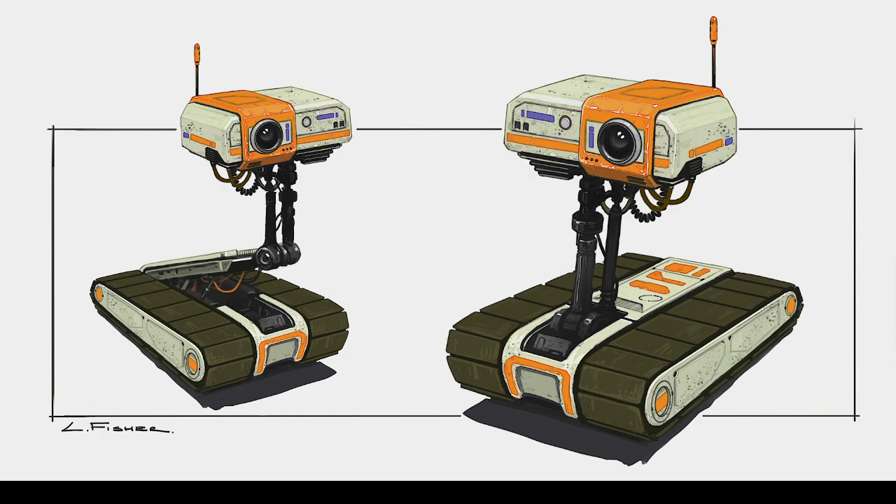There we go. And also, I want to change to a different image because that's not going to show what I need to. Properties. Right place. This one? Yeah, looks like this one. This one right here. Okie dokie. Let me swap over to that for a moment.

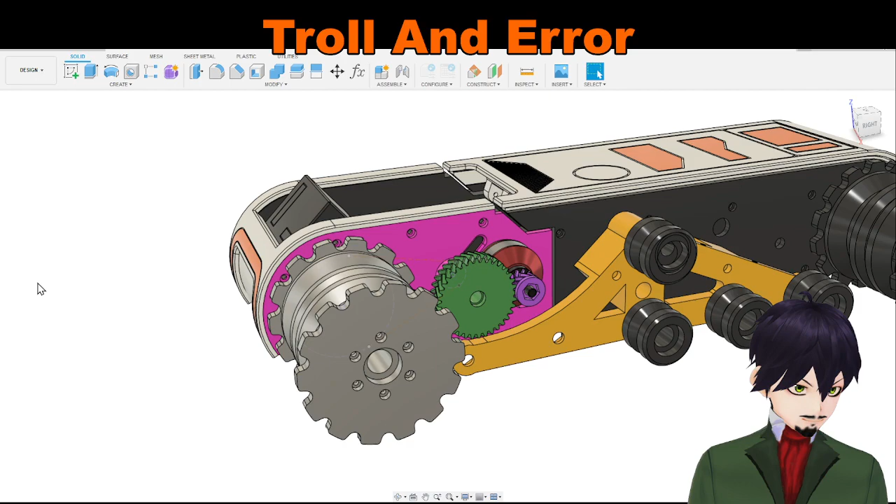Fusion. All right. Tracks on. I can turn those on momentarily here. There you go. Okay, so the sprockets on this roller here actually turn the track, and those are turned by the belt, which goes from this pulley to the one on the back of the green gear. I will hide this track so you can see it. All right, there's the pulley on the back, and then the two gears are what actually turn the belt.

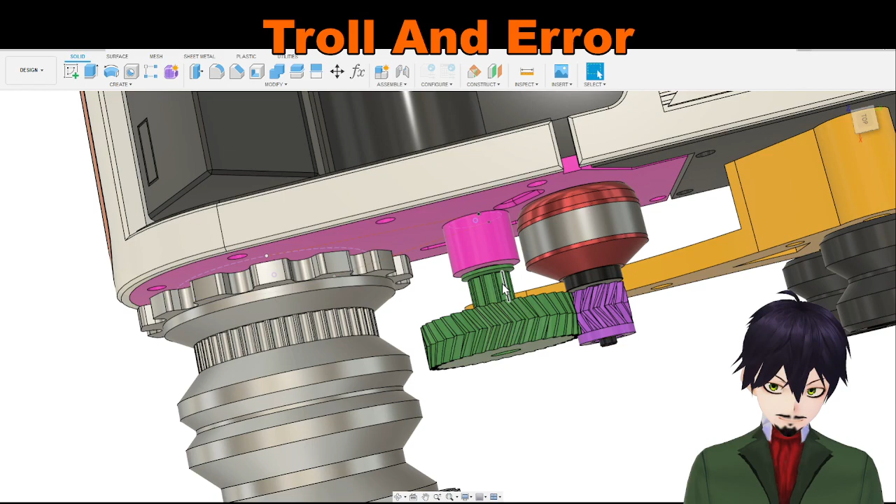Now, the problem I have is that the belt does not have enough tension, and it slips. It basically skips teeth right around this area. Largely because this pulley is very small in radius. It only has 10 teeth. And so the belt just kind of skips over it directly.

All right. Now, why is this thing pink? I was trying to illustrate something in screenshots. So I'm going to make it one of these colors, probably this one. We can see what's going on again. All right, close that. Okay, I wanted to make the entire thing black. Find the part here. Chassis, body. This part. Front outer wall.

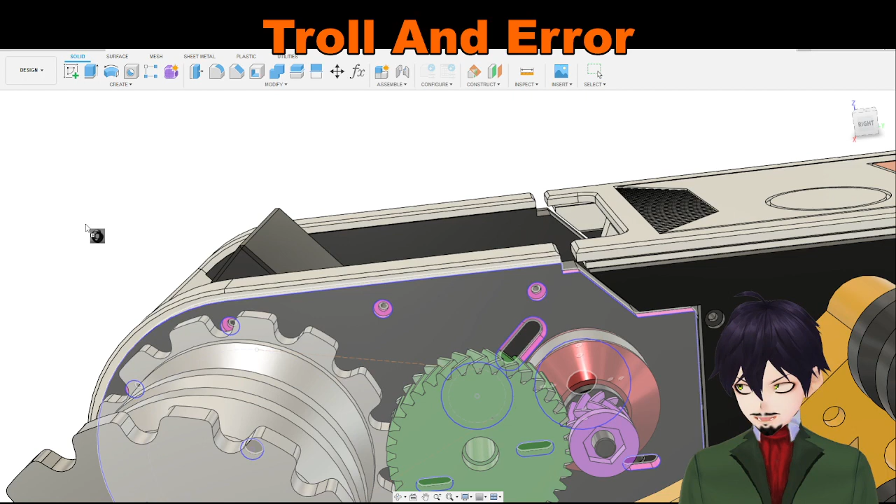I know you cannot see what I'm looking at here. I'm dragging this material over from the appearance browser to the actual browser, dropping it on the part. Remove these appearances. Okay. I think perhaps that's the wrong color. I'll use this one. All right. Okay, so we're back to black. Good, that's what I want.

All right, now, as I said, the belt, which goes from the small pulley on the back of this green thing, to the large pulley here, basically goes from there to there and back. It's not tight enough, and I need to put a tensioner in here. I'm thinking I'm going to use this screw hole.

It's actually the hole for an M5 threaded insert, but an M5 bolt goes into this hole, and that is what connects these two parts of the body and chassis. It keeps it in the slot. There's also another one there, and in theory a third one up here, which I don't actually use. But I figured I could build an idler.

Flashing is annoying, isn't it? No, that's not it. Selection filters. Changing the filters on this, so maybe it will stop highlighting body faces. That's what I want. Maybe. Nope. Okay, well, some filter in here. Ooh, lets me turn that off, but I don't know.

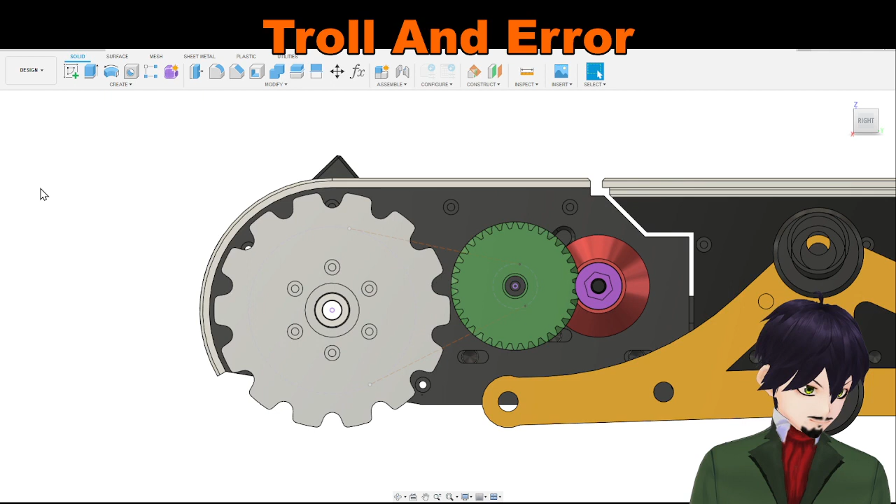In any case, you can see in the background, barely. Turn off this, turn off this. You can see these dashed lines here, and you can probably make out that and that, maybe. But what this represents is the path of the outer edge of the belt. So the belt goes this way, around the loop, and back up this way, and comes back around. All right, so I need to put a little roller in here to push this line, bend it upwards, and make it tighter.

And I'm not sure how much I need to make it tighter. I mean, how far it needs to be pushed to make it tighter, but it needs to be tighter, definitely. All right, now

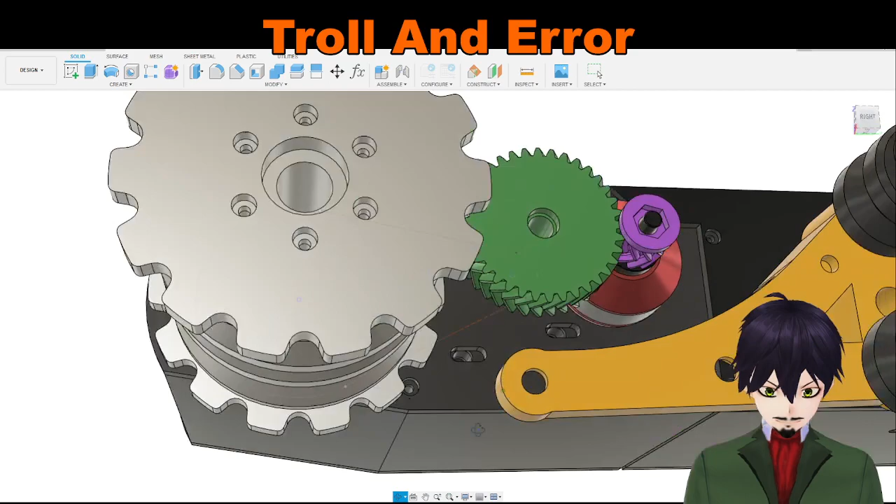I mentioned this in some videos I posted on YouTube, but the roller for this device needs to be roughly from this plane to this plane, or really more accurately from here to here, because that is the width of the belt, more or less, or at least the potential width of the belt. The belt goes across these two pulleys. It's really probably more accurate to say this plane to that plane, or the plane that those lie along, I guess, because it's a little narrower than this pulley is.

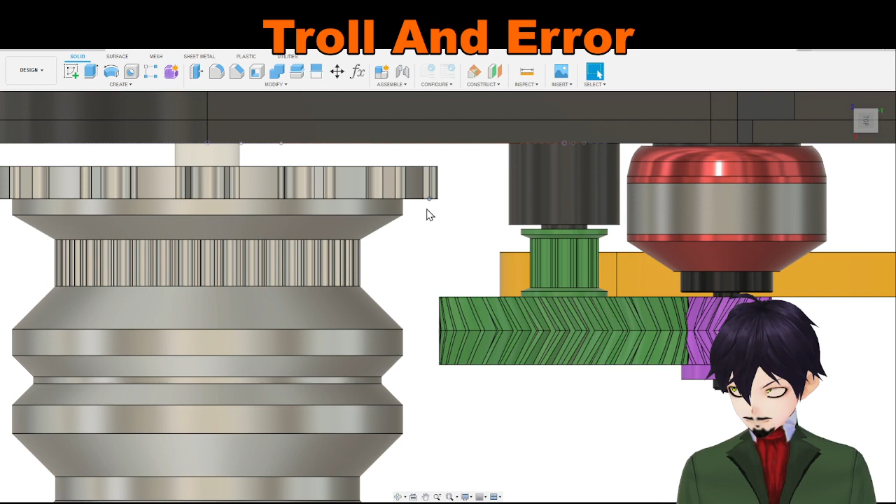But the problem is, of course, that I have to get it out here, and it can't rub against this part of this gear. And there's going to be a bolt sticking out this way, because a bolt's got to go in towards the body, where the part that I'm going to design to go here is, and threads in there, and basically spins, but there are bearings that need to go in there.

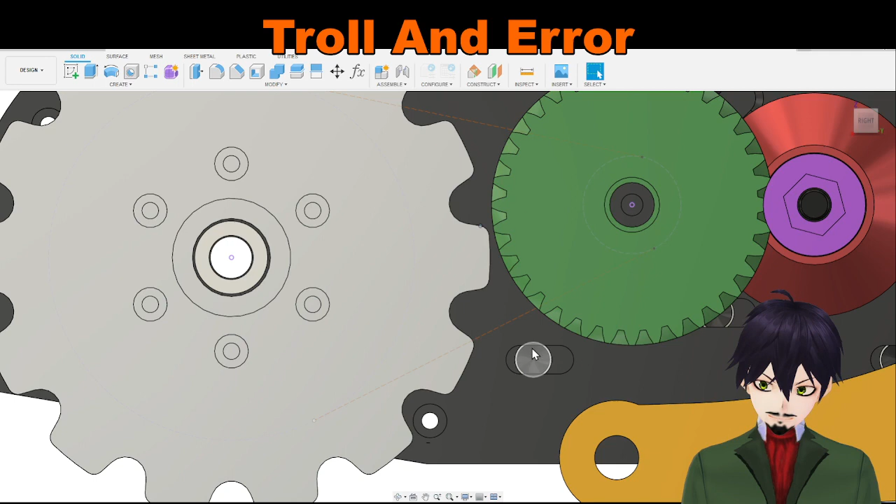And what I might do is just design a holder for a pair of bearings. I'd really rather have flanges on it to keep it from coming off track, but we might have to settle for just the bearings. So as you can see, there's not a lot of room in between these parts for this. I have to be able to access the screw to attach it. So we've got a couple of things that we've got to deal with here.

Right. A drink. Can I put some music on without being ridiculous here? No, probably not. Can put on some music from here, but I'm not really sure I've got any that work for this. So, yeah, OBS back so I can see what's going on. Cool. All right.

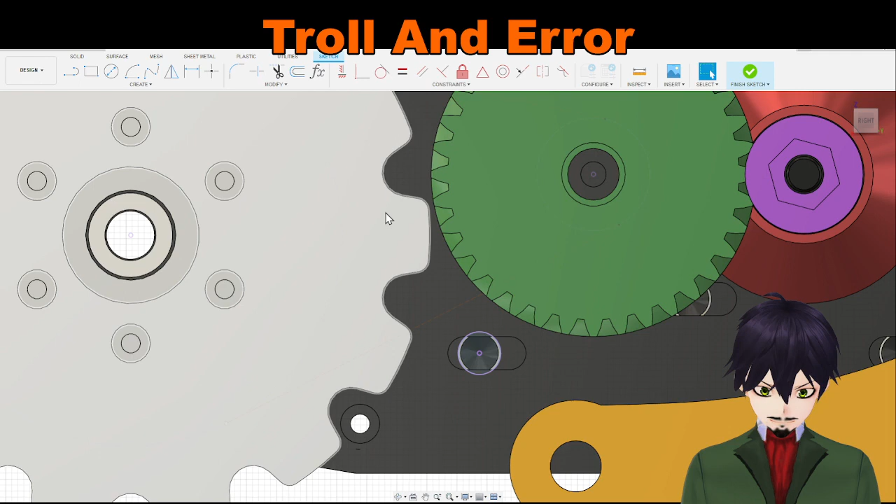So, all right. So I know I need a few things. I need to make a sketch. Make a sketch, come on. All right, it's going to be on this plane. Stop moving my model, thanks. Fusion has this annoying habit of doing things without asking. When I use a sketch, it hides it, which is annoying. Wish it would stop. All right, so we want to project this circle, mostly so I can get the center point. All right, so there's a center point. Make that dashed so it doesn't affect anything.

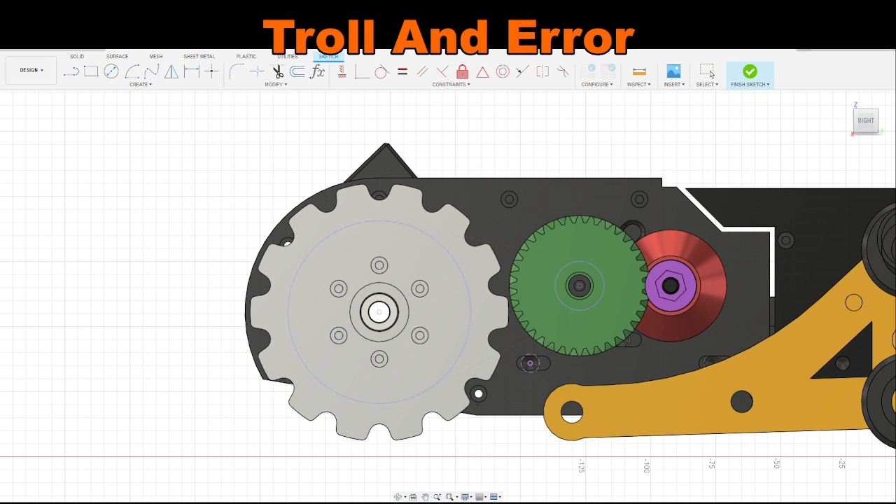I'm going to back up. Look, okay, good. I'm going to project these other lines on here. Project this one and this one. I'm going to need to move things around. Good. Everything's working except my camera. Just fine. All right, project those two. In here now. All right, good. I'm going to turn off the chassis. Turn off the track drive. And I'm going to turn off these pulleys. All right.

And this. Okay, so we're just left with this sketch. These two things. Here's the sketch that we had active before. Is over here. That off. All right, cool. All right, so let's get those out of the way. I don't have the belt path. Let's project that as well. Cool. Okay. Wait for Fusion to catch up. All right. So this is the original path of the belt, and we need to design a standoff.

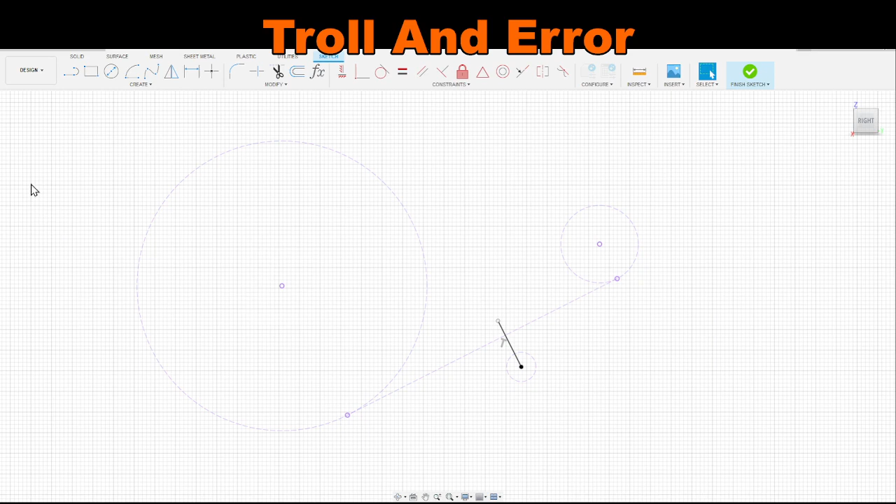I need to decide how far in I want it to go. I'm gonna make a line here that is perpendicular to the belt. I'm actually going to need those things that I just turned off. We'll find them again. Not that. That and structure. No, yes, no, no. The track chassis, not check. I did that already. Track drive, the wrong side. This one. All right, we can turn that off.

All right. So I need to know how far in this needs to go. And I need to keep it. Okay, I want this to be like 80 degrees. No, wrong way. 110 degrees. Because I need the bolt head to miss this part. And maybe 100 degrees. All right, that seems all right. Okay. Let me check my parameters. Show parameter M5. Screw outer diameter is 5.5 millimeters. Inserts 8.2. M5 hole. Blah blah blah. All right. This one is 7.10.

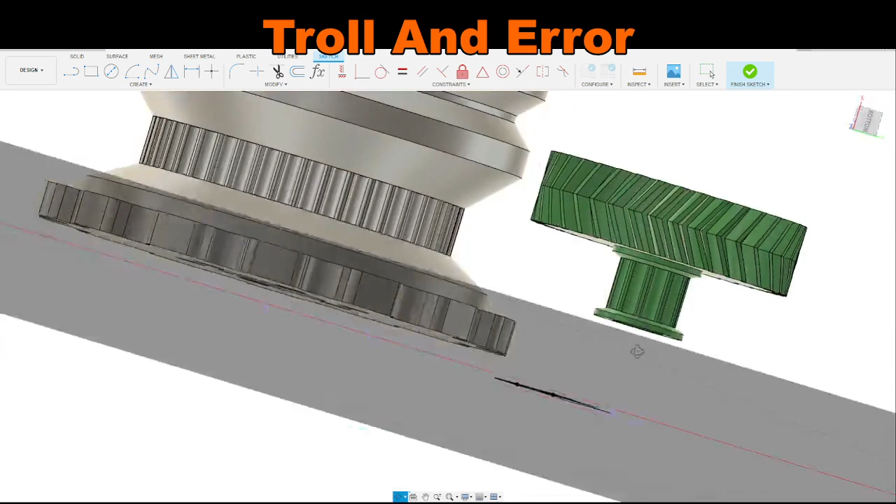All right, so you might have noticed I put the sketch on the sidewall here, on the sidewall of the chassis. That's where it's going to rest. And the issue I said you might have noticed is that the sprocket would hit this thing if it went straight out. As soon as this tried to turn, it would hit this part. So this thing has to go up and then out a bit. So maybe the easiest way to do that is to put...

You keep doing that. Stop it.

All right. I'm going to remove the slot because I decided it's silly. Yep. All right. So what we actually want is a circle centered on this circle, radius M5 screw outer diameter plus 5. And we want one centered on this one, which is M4 axle hole, hole plus 4, 3, 4. We'll go with 4 for the moment.

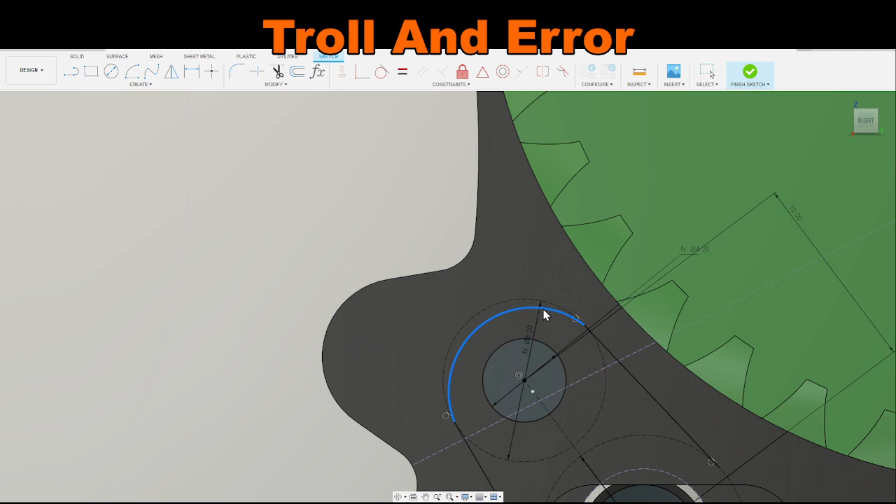You need the same radius as the other one, which is D2851. So D2851. Oh, it's a radius, I bet. Hello? Yes. Times 2. Nope. Am I dumb? What am I doing stupid here? That's what I'm doing stupid. This center point is not in fact locked like I thought it was. Okay, never mind. That was dumb. Now we do the same thing over here. See, I clicked on this point on the other side, and it still did not lock it to the center, which is annoying.

Fusion, could you maybe lock these points together when I say lock these points together? That'd be good. What do you think?

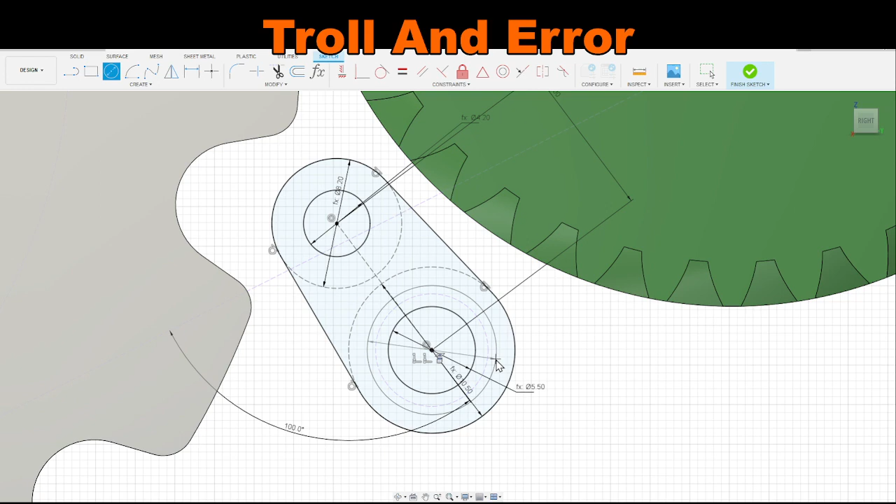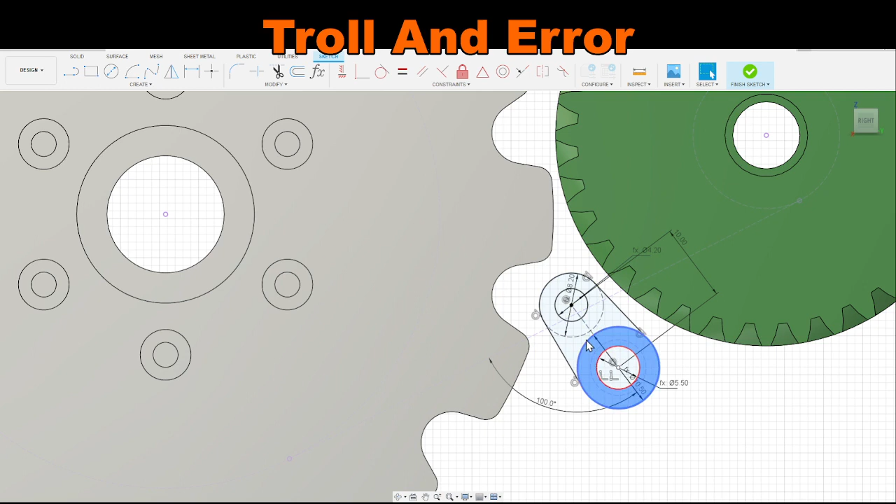All right, so, all right, that's good. Now I'm going to put another circle in here for M5. Actually, I'm not going to do that at all. Okay, so this is basically our standoff. I just realized I don't need this second arc at all, because I intended to put this solid. It's okay. You'll see why momentarily. Perhaps. Or let's do it on this side. Yeah, let's do it on that side. The reasoning is that I don't want this entire thing sticking all the way up, because it might still hit this gear.

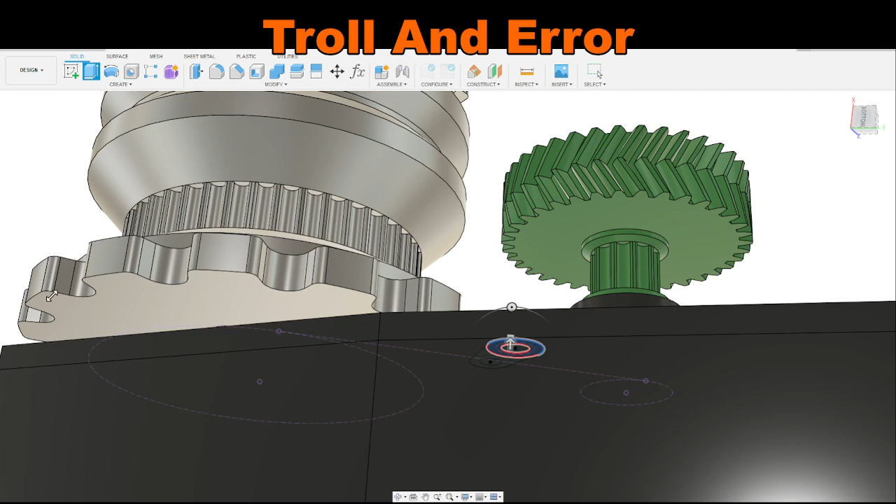Alright, so now we need to go to the side view here so I can figure out how tall to make it. Select the profile. Thanks. Alright, now we're going to go up to that object. Actually, that seems like a good place to go. No, I want to go lower than that. So I need my chassis. And I need to turn off this gear. I need to go to this point. Like so. That will clear the sprocket.

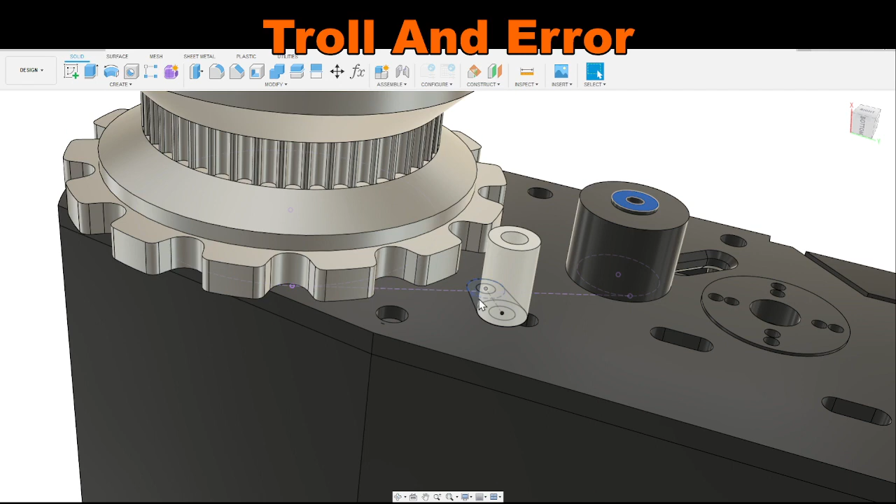Correct. Good. And now that's what I was talking about. Fusion has hidden my sketch and irritated me in the process. Right, there's my sketch. Right. Now, what is the distance that I have to work with this thing? Actually, I kind of messed that up. The object that I need to go to is, in fact, this surface. The reason is I want one of these little things sticking up for the bearing surface, not just like this.

Okay, what diameter is that anyway? I can't read it. 10 millimeters. Okay. Now, we need to extrude. I was interrupting myself. How far do I have to work with? 5.563 millimeters. However, there's got to be a nut on both sides of this hole to hold the axle in. I suppose technically there doesn't, because the bolt can thread directly into this part, but it's really not the best idea.

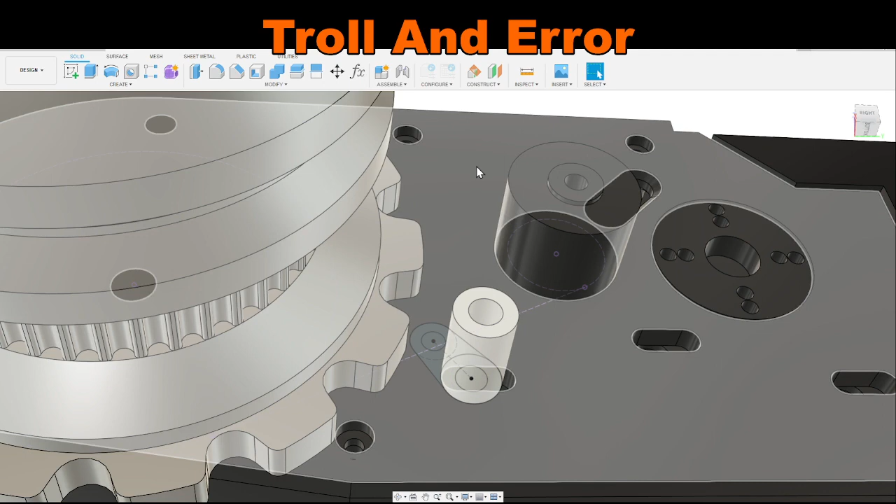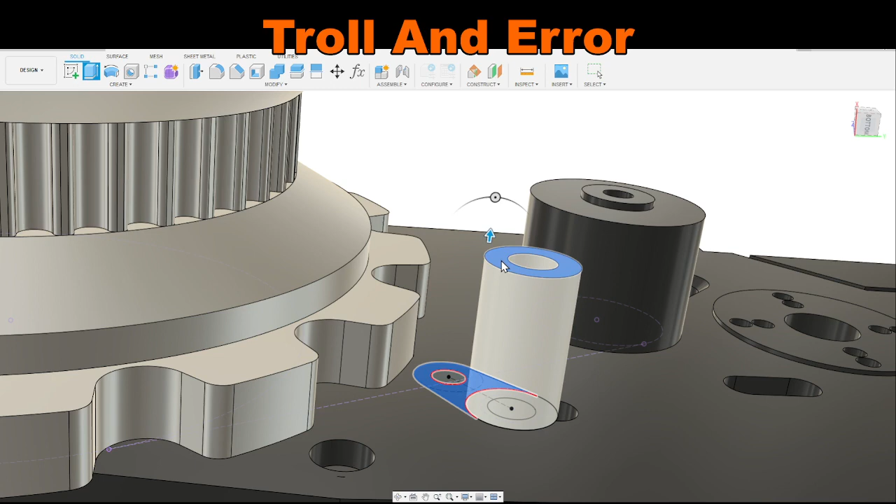I can recess the hole, figure out what size that needs to be. Did I have one of those M4? M4 screw head outer diameter 7.7 millimeters. What is this diameter? 8.1. Okay. Well, let's select this and just build it. Extrude. Okay, I'm extruding from an object. Is this plane on top of this standoff. I'm extruding. I'm gonna go -4 millimeters.

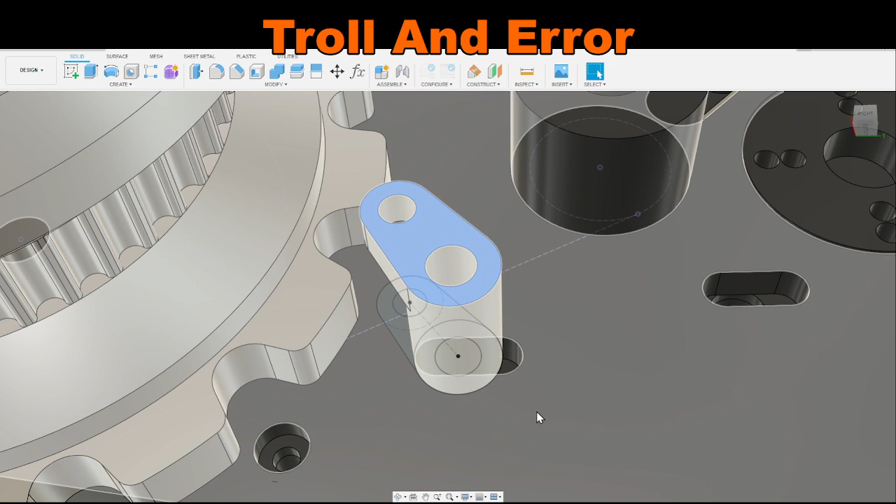This particular sprocket could wobble a bit, and I don't want it to wobble so much. Maybe 4.5. Yeah, 4.5 is good, maybe. I don't want it to wobble so much that it can still hit this part. Okay. Yeah, I'm thinking. There is a way to ensure that this angle is as designed. Specifically, I could make a protrusion down into the slot down here. However, the problem with that is that it can't be.

Let me find the chassis. Here's the chassis. Let's take the front inner wall. Front inner wall, and turn those off. Let's turn off the electronics box. Right, what do we got left here? Electronics box cover, go away. The ESP32 mount, the brain. All right. So it sticks through this slot here.

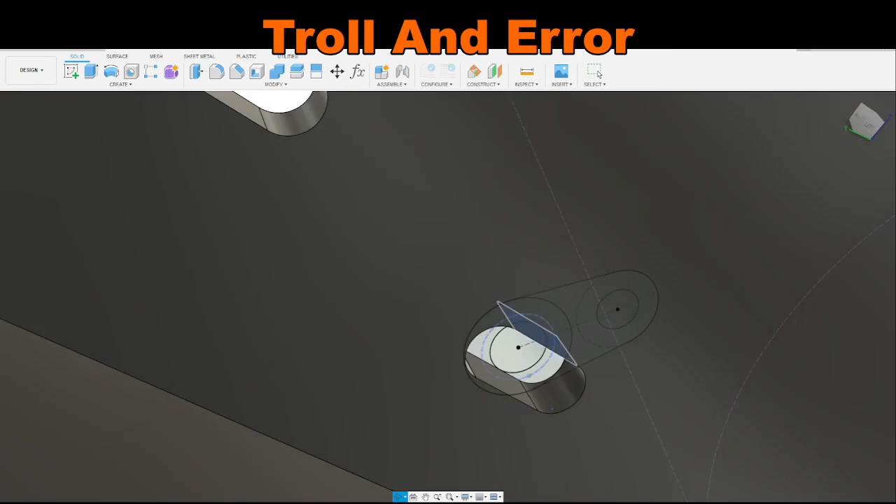So the problem is I don't have a precise measurement for where this screw is inside the slot. It can vary. The entire purpose of it being a slot is that it can be a different distance. So I could only put maybe some thickness in here to hold it in place at this angle, but not necessarily fill this whole slot. So that's a thought, but I'm not sure yet. Okay. Now, trying to decide how best to model this standoff.

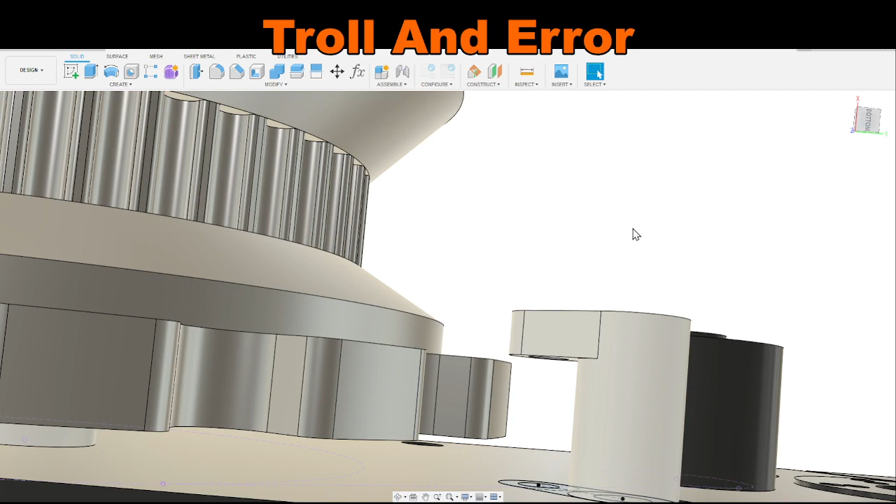The bearings, if I'm doing an M4 like I have the hole specified here, the bearings that I have are 104 ZZ bearings. Those are 10 millimeters in diameter, 4 millimeters thick, and 4 millimeters inner diameter, so the hole is 4 millimeters. I will have to use 2 of them. That's fine, but the reason I'm wondering is because this diameter is 10 millimeters. Can't see it, but it's in the bottom corner. And this one is, what I say, 8.1.

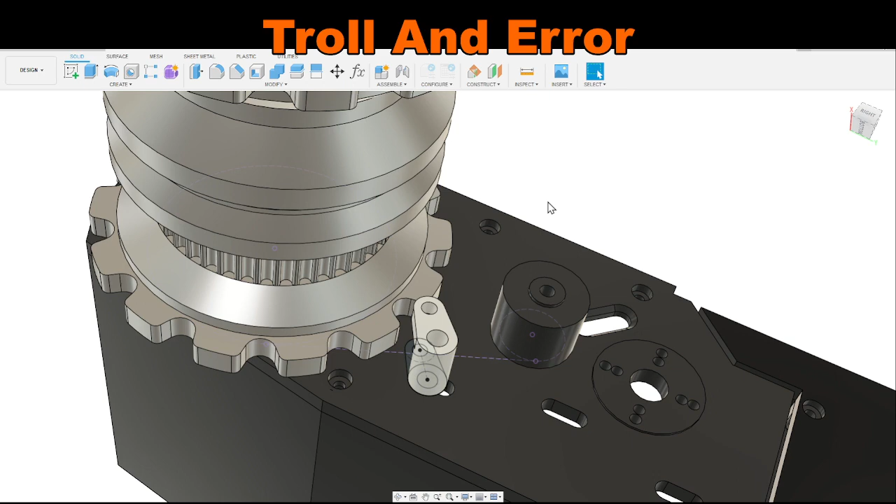So clearly, I don't want it to be 10. I don't want the equivalent of this little standoff or protrusion to be 10 millimeters. In fact, it should probably be, let's see, 10 minus 4 is 6, so 3 millimeters will make it 7 millimeters in diameter. So let's add that to our sketch. We're gonna make that 7 millimeters. It's about halfway from the open bore of the bearing to the outside. So it should line up pretty well. Maybe. I could make it smaller. 6. Try that. That's fine.

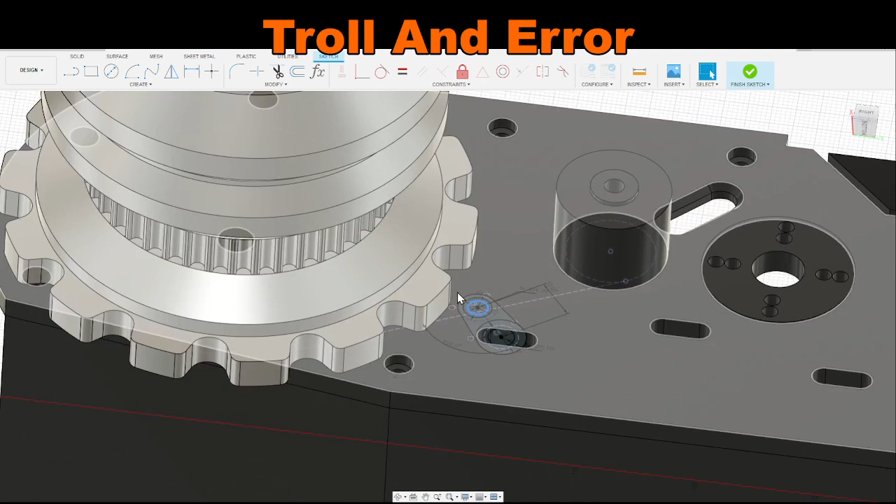Now here's a thought. This is the hole that I have for the axle, and I know that works. This is 4.2 millimeters. This one is also 4.2. Okay, good. So this one should thread roughly like the other one over there. All right, out of the sketch, boink. Take this shape. Let's extrude this from the surface and extrude to object this surface. Okay. Good, good, good.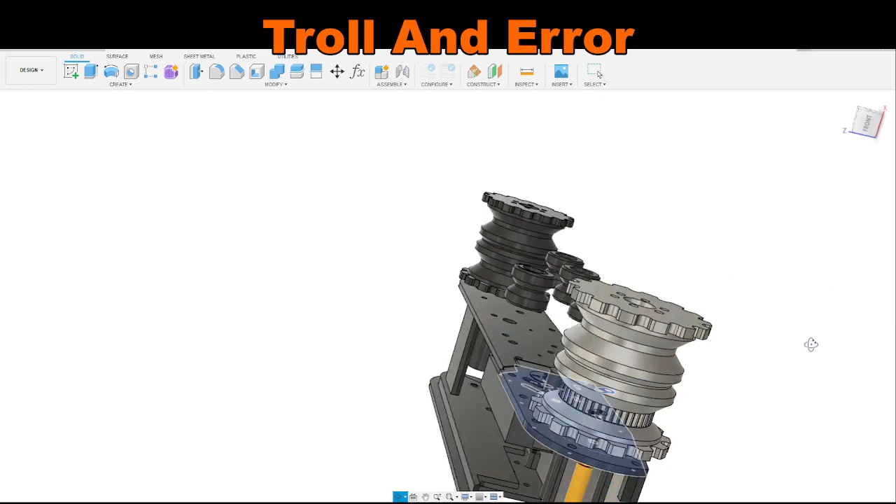So I know that I will need a longer M4 screw for this process then. It will at least be 22.5 millimeters long. Actually probably a bit longer than that. What is this measurement? Get through here is 5 millimeters. Give me a moment. I will have to remove the existing one. Not very easily. I think it's a 10 millimeter screw. So 5 millimeters, 22, 27 millimeters ish. I could put a recess for the screw head here. The thing. All right.

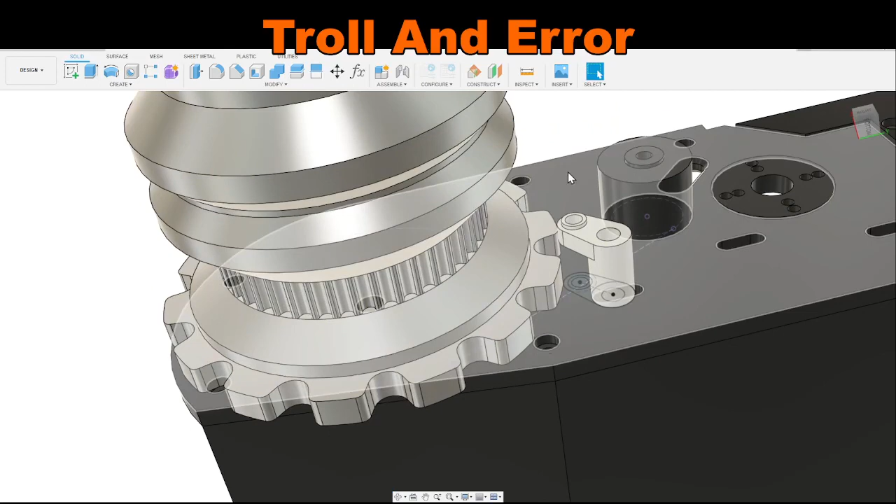Now I need my gear back for a moment. Gear, gear, gear. There you are. All right. So what I've done is I basically made a standoff like this one for this gear that attaches through the screw, which is fine. Now, I need it to go up to roughly this point, this line. Well, no, I need to go up to this line-ish. Are those collinear, I wonder? Unclear. They might be, but this might be sticking out a little bit more.

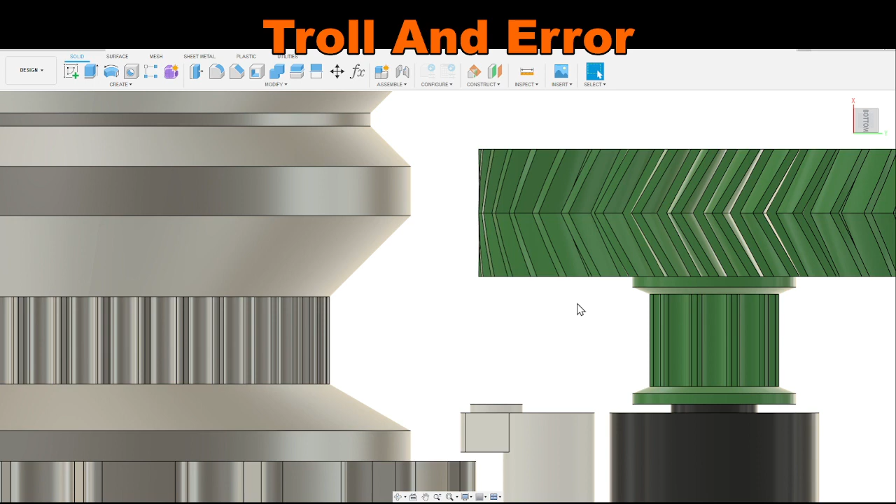Now, the problem is I can't make a little flange thing like this, because that will make it more likely to rub against this gear if it sticks out that far.

Am I dumb? What did I just do? I am dumb. Oh, no, I'm not dumb. Okay, I'm good. I was just having a minor lack of comprehension of what I was doing.

Let me look at one of my screws. I have some M4 bolts right here. These are M4 by 20 millimeters, which should be plenty. I might grab a model from McMaster-Carr and put it in there. Calipers. Alright, so the outside diameter of this screw head is about 7 millimeters. Yep. Okay.

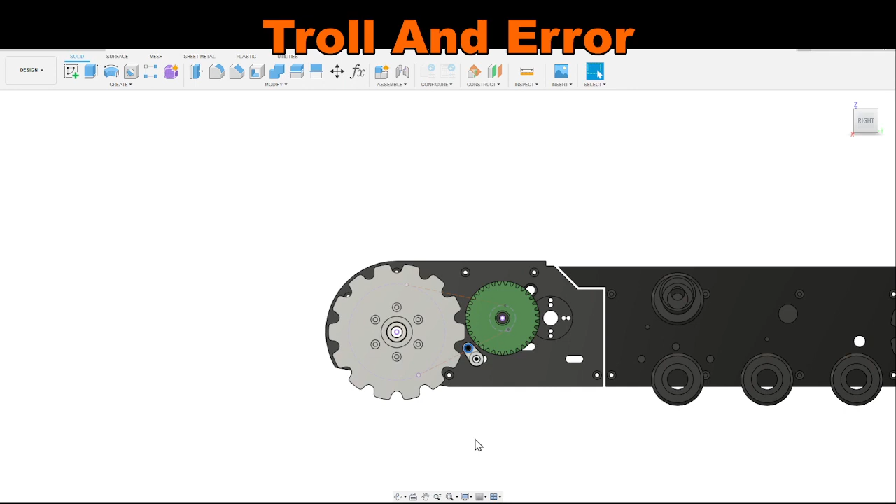So that's the problem. This is the 6 millimeter circle from the center of this hole. 7 millimeters will be slightly wider, and you notice how close this perimeter comes. Where's my sketch? Here it is. Oh, okay, it doesn't have that diameter. So this basic arc right here. Can I stick this on the sketch? I will try. Yes, I can. It's trivial to do so if Fusion will respond.

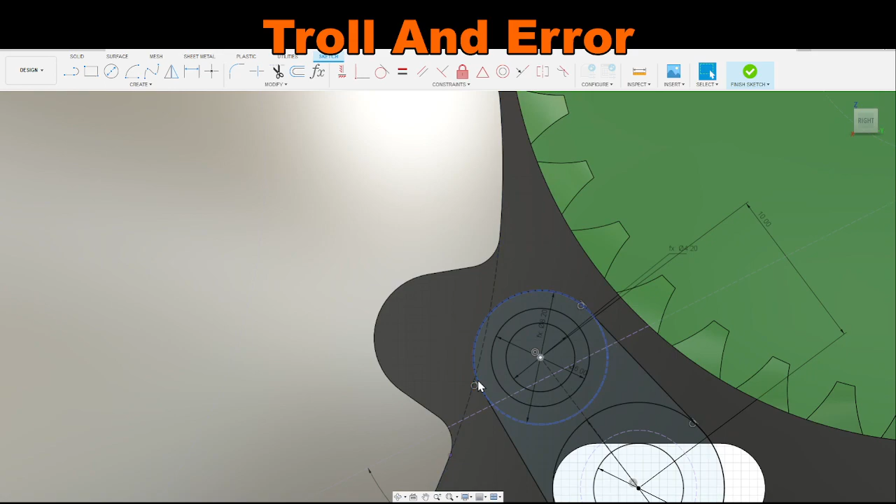I gotta project the point. Okay, see from here to there. All right, so you can see if this screw head sticks down from the surface too far, it could very well hit this thing, especially if this thing is wobbly, which, I built the droid, I know it is. So it might be a good idea to make a recess for that. How tall is that? About 3 or 4 millimeters. 4. So the screw head on this is 4 millimeters tall.

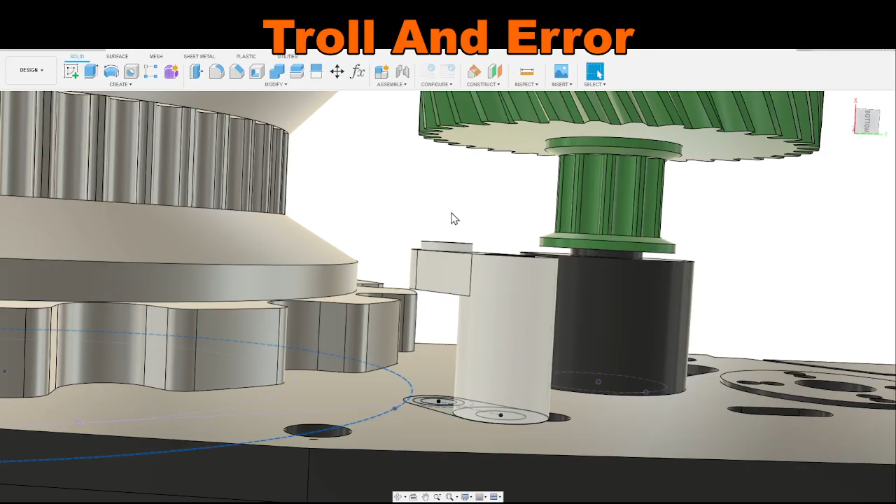I thread into the plastic. I don't think it'll come back out because it is just bearings, but okay, so what I'm thinking, let me insert a component here. Screws and bolts, metric. Want to insert an M4 socket head screw. Length of, how tall is this? I don't know yet. I can't find the part until I find the bolt. So it must be from this distance to this distance, more or less. Maybe a little taller, but probably not. And that distance is 12.6 millimeters.

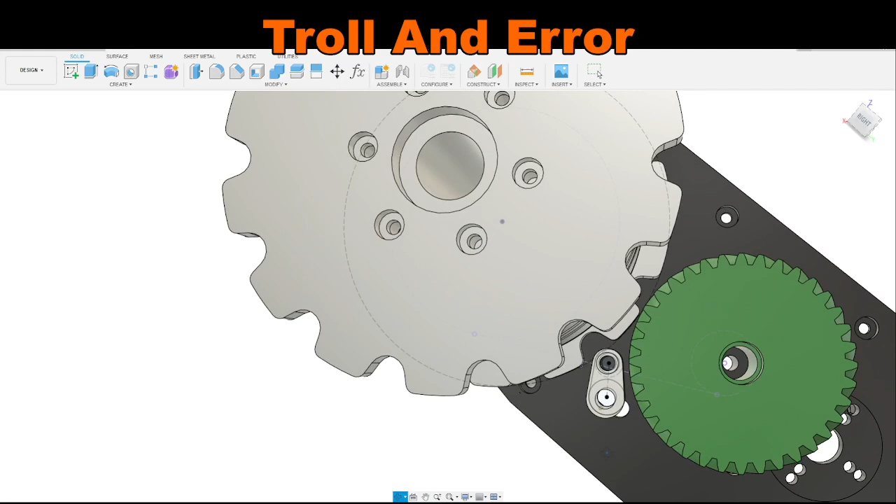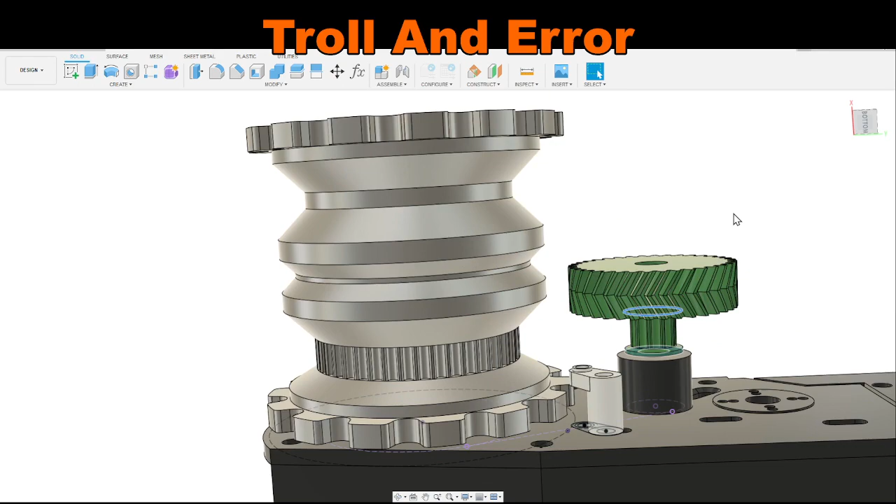Okay, so I don't think the screw would hit the green gear if the screw head were up in this area. Could be wrong about that. No, it's fine. It is way, way far away from that circle of 7 millimeters. Let me orient properly here. Okay, so that's 6, it's slightly wider than that. So this pulley's fine. I can have the actual idler go from that surface up to at least 12.6, if not go to that surface, which is 13.4. Okay, 12.6.

And the head would stick up past that. Plus, there would be threading into here. 5.5, so 17, 18. An 18 millimeter-ish M4 bolt. I mean, the 20 millimeter would work just fine. Okay, that seems plausible. You know what? I'm not using the model right now, I can turn that off. Cool. Get a drink.

I will say that this part is likely to be a pain to print. I'll need supports on this arm. But that's fine. Alrighty. Where am I creating? In here. That's fine. All right, you're going to be idler. Okay. Rename the part. It's time to save, perhaps. Okay.

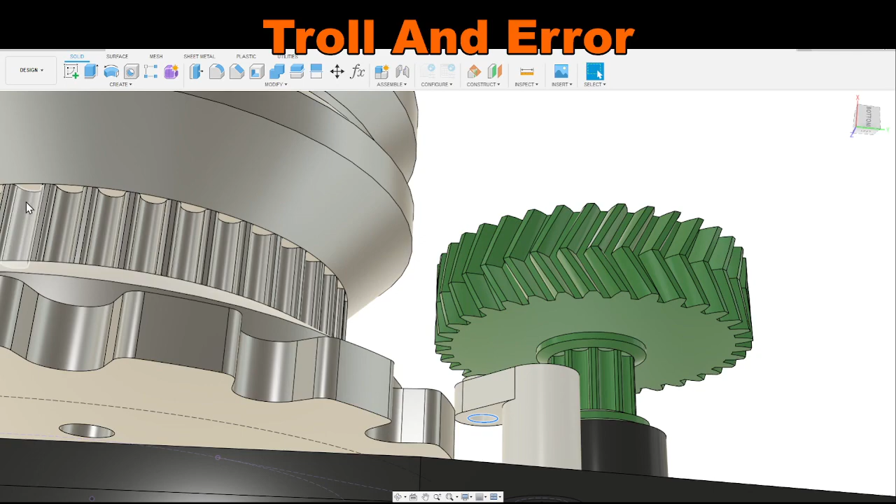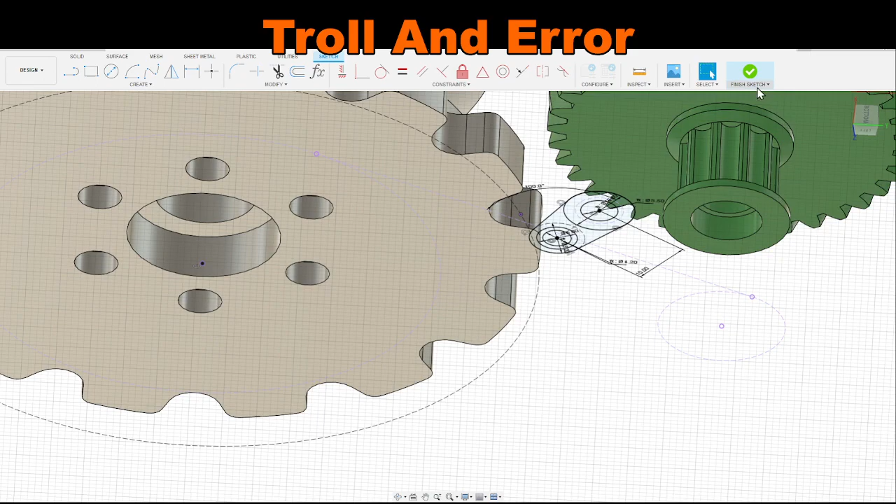But yeah, doesn't matter if the screw sticks out below this hole because I think that is far enough away. It will not strike the drive wheel here. It's just the screw head that I'm concerned about. Oh, I'm not in the sketch, that's why I can't do that. Alright, distance between here and here. Minimum distance is 1.488 millimeters. Still kind of close, but fine, more than likely. Okay.

Okay, so what was it? I said 20 millimeters. Let me go get a screw to stick in. Screws and bolts, metric, M4, 20 millimeters, socket head. Don't really care which material it is. Fully threaded. This one works. Let me put it into STEP and download. And now we wait for Fusion. There's a screw. Rotate the screw this way. Oops, no. It doesn't matter.

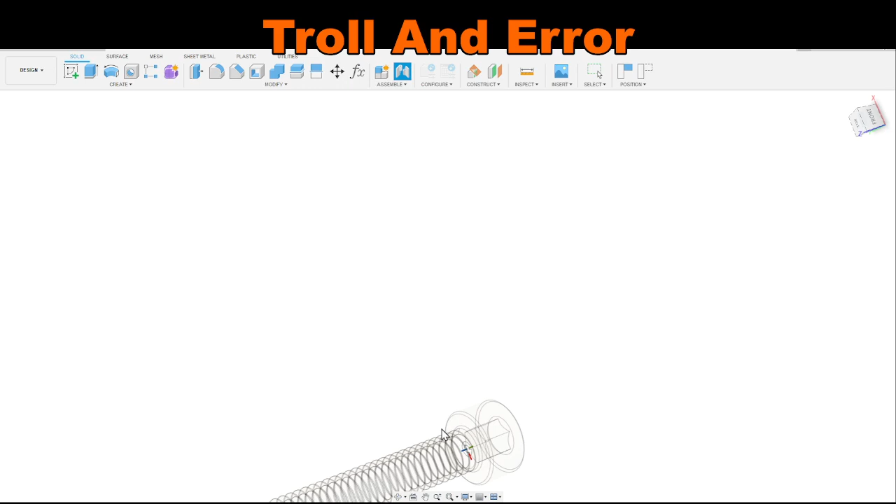Need to rotate it, or doesn't matter where I put it. Fine. I'm going to put a joint right on the underside of the screw head, and then I'm going to... Can't do that yet. Actually, put the part on that is supposed to sit in. Okay. In that case, let me grab two bearings as well.

Insert component. Bearing. Whatever, revert position, it doesn't matter. Excuse me. All right, insert component. Bearing. These are going to be 104s easy. Bearings. Wait, 104. Hello? 104 bearings. All right, 10, 4, 4. Yeah, perfect. Step, download.

Those. Did you download? You did not download. Yeah. 04. Bearing. Step file. Download. Thank you. Yeah, fine. I don't really care where you put it because it's going to have to move. So look down at the bottom.

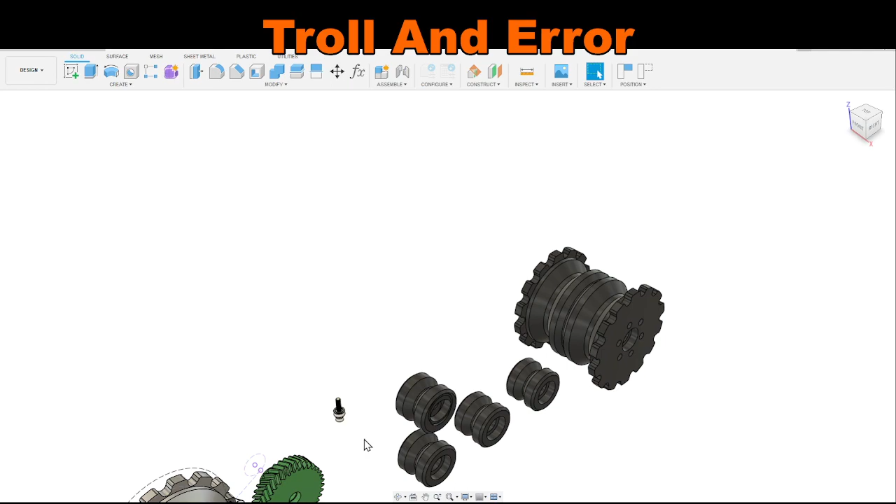Why is it there but not visible? That's bizarre. There it is. Okay. Came in invisible for some reason. All right, so we got a bearing, we got a screw. That's cool. That's all I need. Don't really need these rollers on here. You, and the rear, and the small one. Okay, so this is all I care about right now.

How long have we been going? An hour almost. No drop frames. I'm impressed. Didn't jinx it.

Alright. Should I grab an M5 screw as well? Yeah, let's do that. Screws, bolts, metric. I do tend to use the word screw and bolt somewhat interchangeably out of habit. What did I say? 22? Go with a 25mm long bolt with a socket cap, fully threaded, like you. Download. Download.

Come on. There it is. Okay, so there's the M5 screw. Cool. And it is, of course, invisible as well for no apparent reason. Alright. Actually, I want it to be invisible for the moment. Now I need to model this roller or whatever.

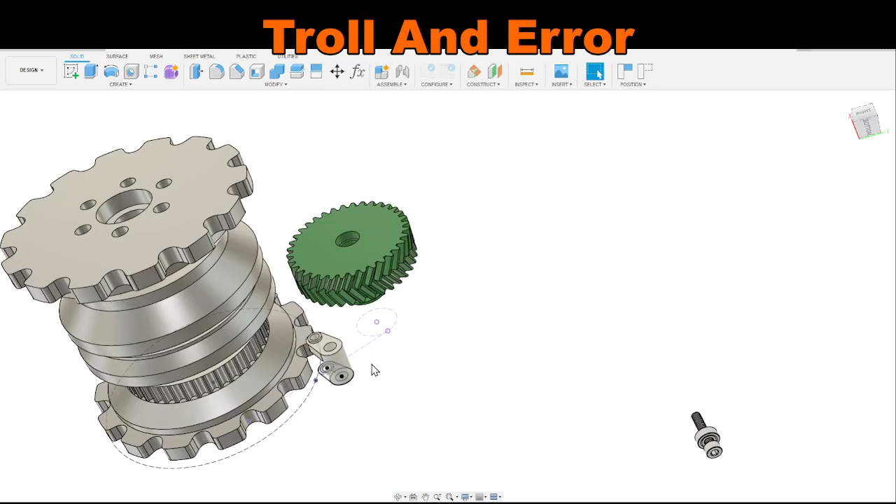Okay. I'm going to put a construction plane. Yeah, whatever. Capture position is fine. Okay. I'm going to align it with this particular plane. It's going to be 0, and I need the construction plane to be visible, which would be the most useful state for it. There we go. Are there any others visible? No. Okay. So that is approximately the top of this roller. Let's go with the bearing version first, because I'm going to have bearings on here anyway.

It's occurring to me that I might need this thing here to be actually up here. Further up. So, we fix that. Or I make this thing there. I'm going to pull this up to this height. Or slightly below it. 3mm. Wait, what's the thickness of this bit? 1? Yeah, so I'm going to pull that up by 2mm. 2. Alright, then we're going to add a further 1mm on top of that.

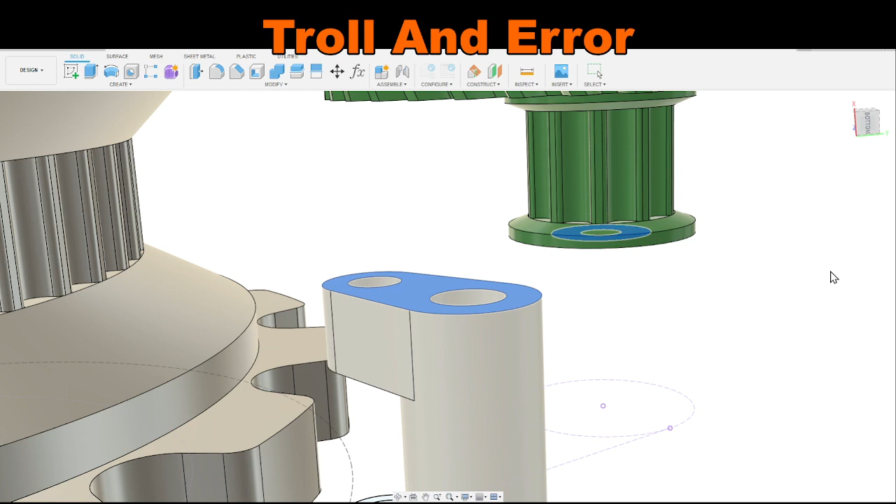Profile plane here. To object. Change the object. Hello. Thank you. Oh, and select the profile. Here it is. All right, there we go. Yep, that's good. Okay.

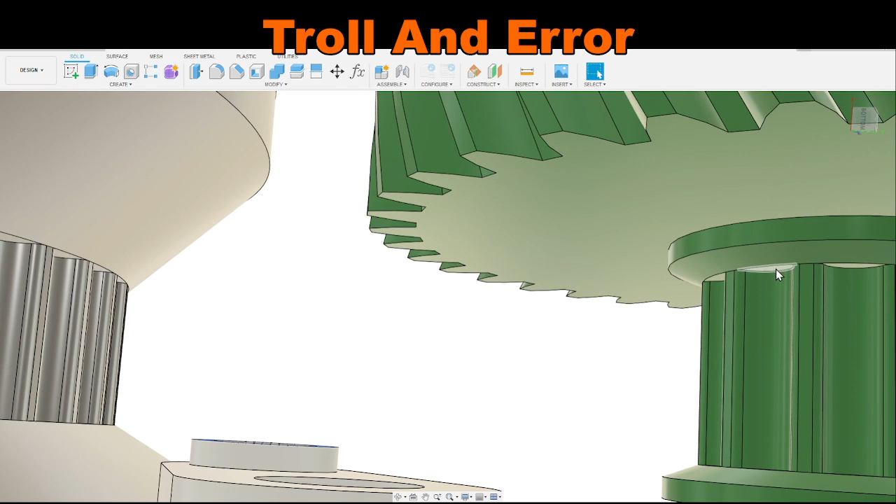All right, so I need to make the pulley thing idler. How thick are these? Or how thick is this distance that I need to go? 10.6mm. Okay. Thickening this part, by the way, will make the screw threading in better. 10.6mm. These are 4mm in diameter, or thickness rather. Where'd they go? Oh, I went back in history. That's right. I really should move all this stuff further back, but whatever for the moment. I'm just noodling around for the moment.

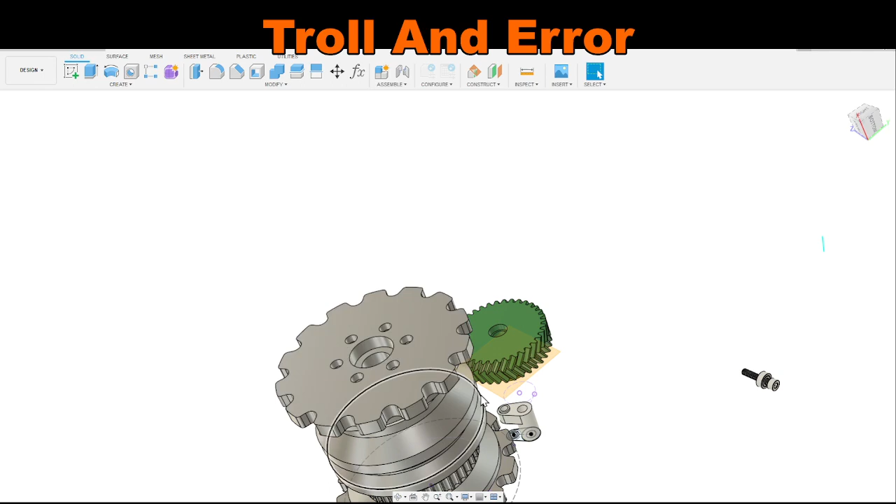Okay, let me grab the... I don't think I can get away with 3, can I? They're 4 millimeters thick. That would be 12. What you got as the actual thickness here? Yep, 4 millimeters. Okay, turn off the screw. All this stuff because it's a bit excessive. Okay. Joint. I'm going to put a joint on that and a joint on this. Okay. There's one bearing.

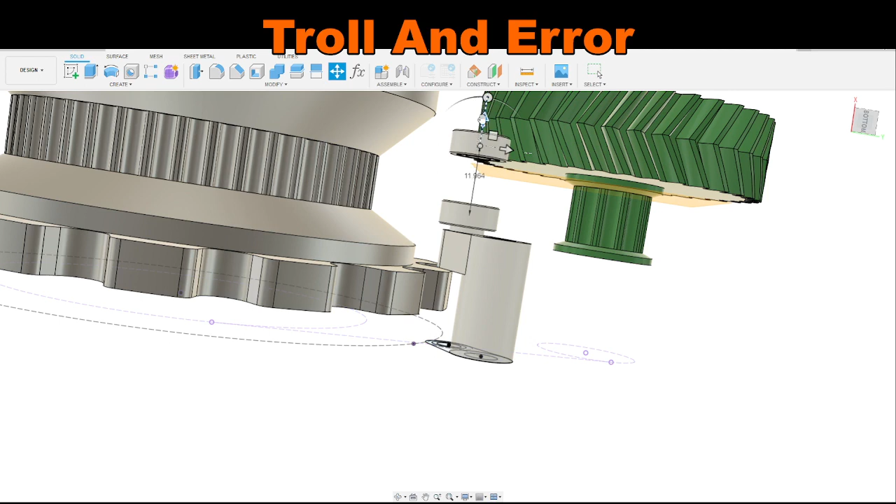Okay, let's add a duplicate of this bearing. So copy and paste. Paste. Fine. Okay. So I would need a spacer, or I would need 3 of them, or I need a separate idler. This would be the simple way to do it, though. Pondering. Third one would put it...

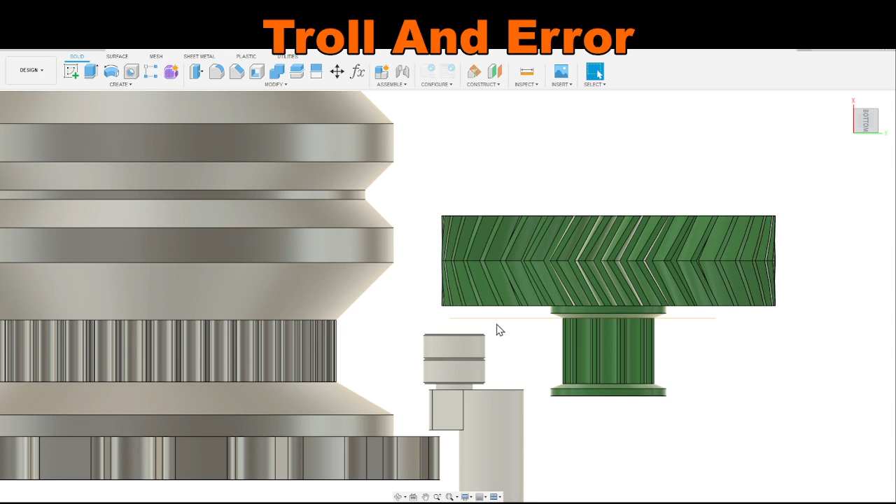I'm going to paste again. And, alright, let's move that one out. Sure, I don't care where you put it. I'm going to be moving it. You down to you. 3 bearings, no waiting. Okay, there's not a lot of distance here between these 2 parts, but they don't overlap. So that's fine. I can hide this construction plane because I don't know if I need it necessarily. Hide the sketch for the moment.

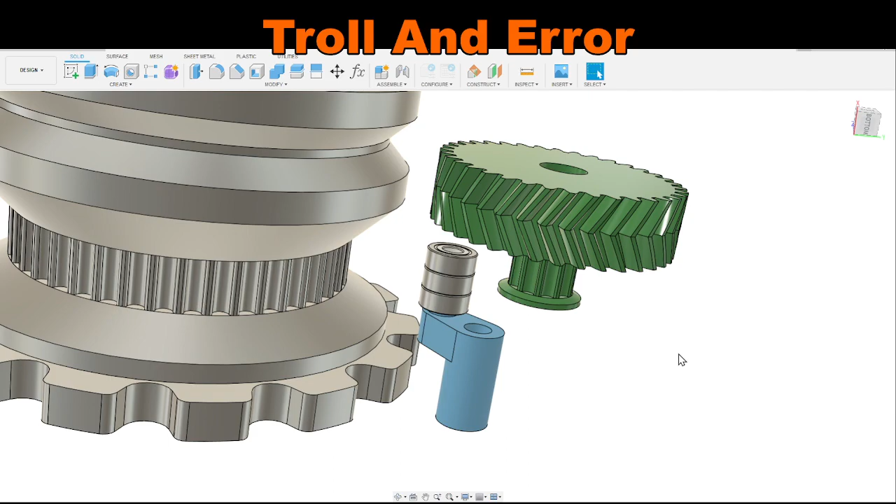Alright, let's put the bolt through here in a moment. First, I'm going to grab a color, make this light blue. Cool. All right. And also, let's make these bearings silver. There we go. Just so they are a little more distinctive. I could, in theory, make the insides red. My little part. Okay, good. It did cover all 3 of them. Cool. The bearings don't actually look like this, but that's okay. I don't care. All right, now the screw.

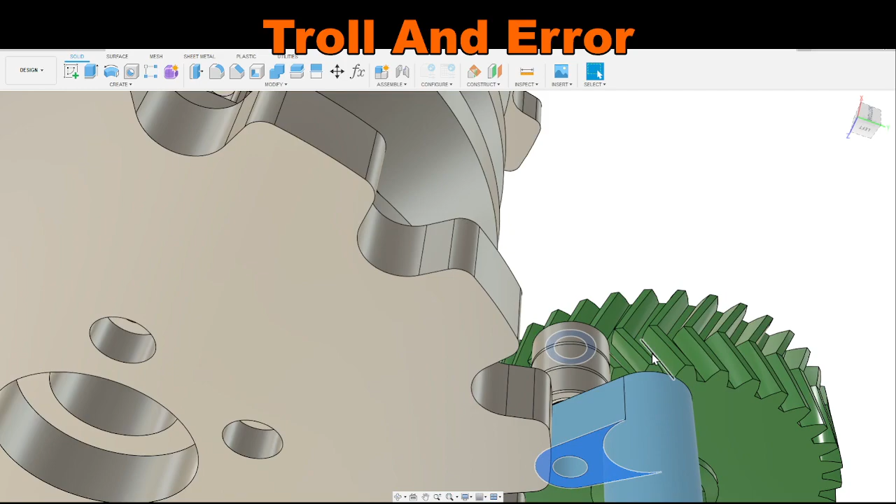This screw. Now we can put the joint in. Actually, this screw is now too short. Or is it? Yeah, it is. Need to go from here down to here. No, it's not really too short. Actually, just about right. Take out a little bit, but that's okay. So let me make this thing silver or black or something.

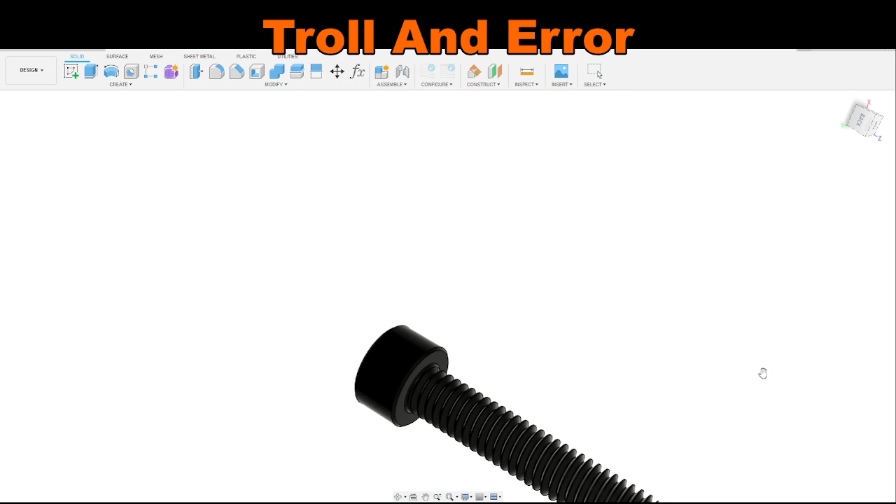Just to give it some nice looking appearance. Metal coatings, black oxide coating. It's a little hard to see. Also, that's a download thing. Iron, aluminum, brass. I'm gonna make it brass just because I can. It's not actually going to be brass. Maybe matte old brass. Maybe not. Maybe polished brass. Polished brass, yeah. As if I have gold hardware in my droid, or brass, I guess.

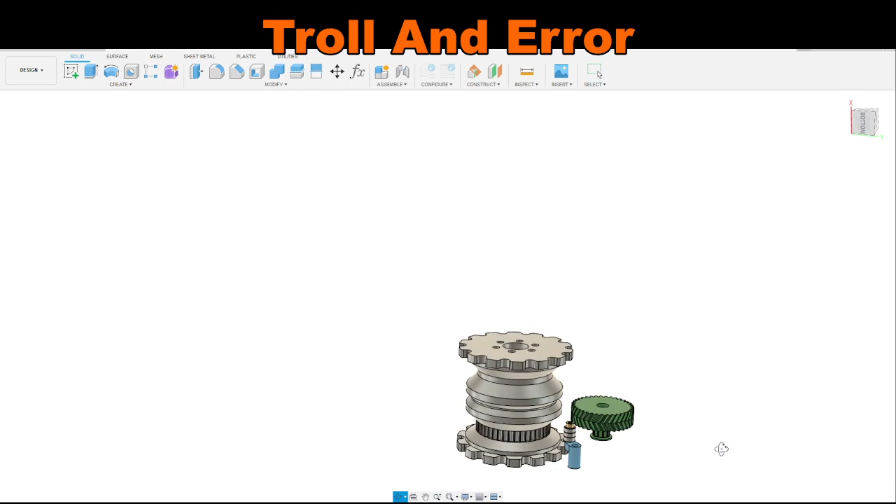Alright, so let's get the joint, connect to that point. Go over here, connect to that point, and flip it around. So, something like this. And then I get my M5 screw. M5 screw, there you are. Length did I get? 25? Alright. Joint. Put the joint here. That is not long enough.

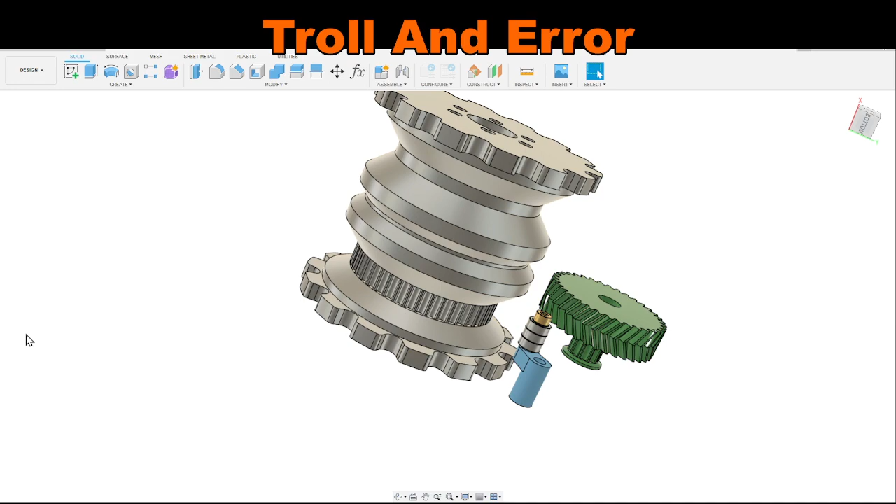Okay, let me find this screw. I'll add a different one. Let's delete this. Delete. All right, let's delete this. Delete. Yes. Don't care what reference it is because it's going away. All right, give me my chassis back. Body, chassis, where are you? There you are. Okay. I need it to go in. Should have those inserts in here somewhere. Maybe. It's weight bearing.

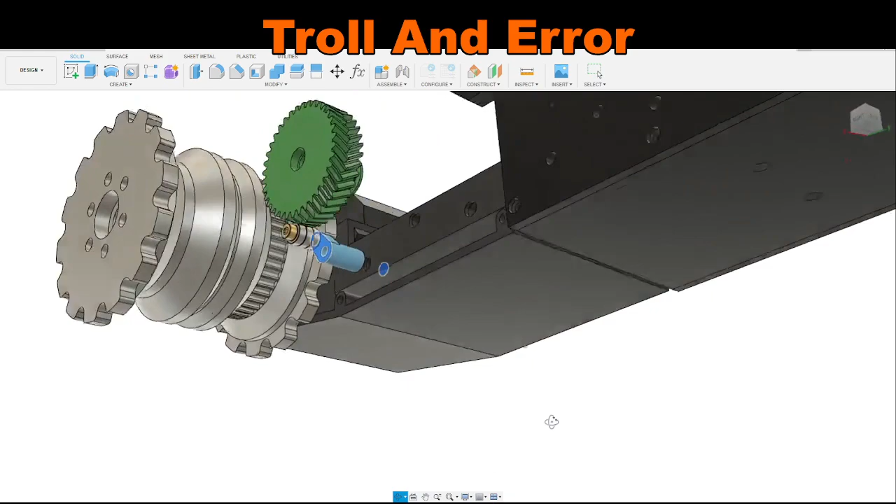Actually, I know what I need. I need the electronics box and not the front outer wall. Electronics box has the hole. Alright, so I need to go from the base of this hole to here. That is 35 millimeters. I don't really need the full 35. I could probably get away with 30. Seems about right. So let's go get a 30 millimeter M5 screw to get in here.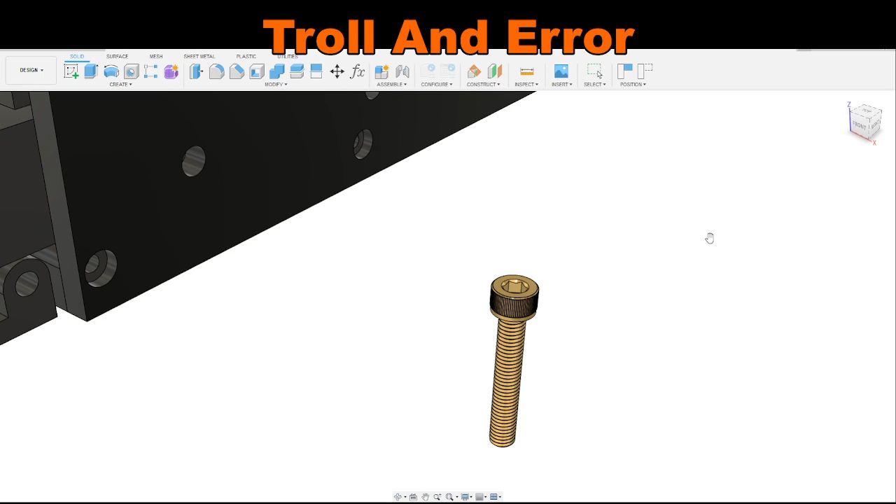Okay, bolts, metric, M5. One at 30 millimeters long. We want it to have a socket cap head and be fully threaded. Download. Cool. All right. Wait for Fusion to catch up. All right, here we go. Let's move it out here so I can see it. Let's make it also brass, just because. Actually, no, I don't want to make it brass. I want to make it fancy anodized blue aluminum. There we go, just so we can tell which one's which.

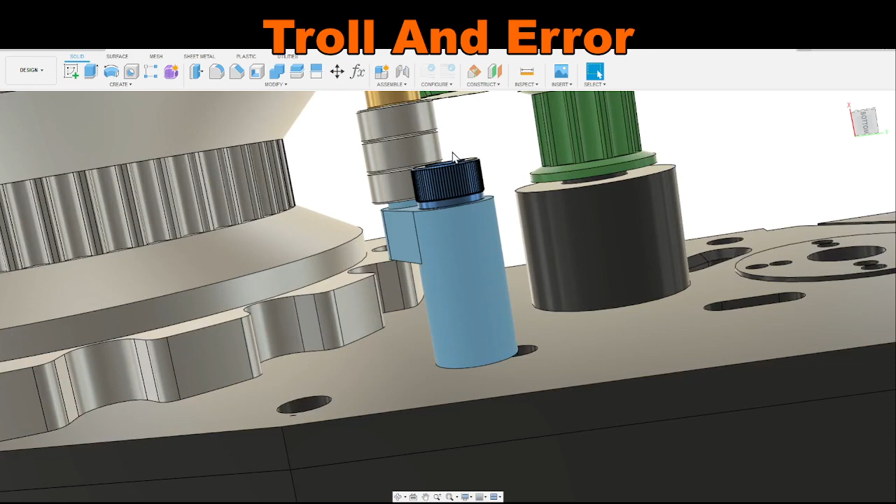Okay, so that bolt goes in that hole. Just like that. And now I can turn the other part of the chassis, the front outer wall, on. Okay. All right. That would probably work. Except I see a flaw in my plan. A pretty big flaw. This head sticking up here would... No, actually, it's not a flaw at all. It's fine. I'm dumb. Because the belt is going to go from this pulley up.

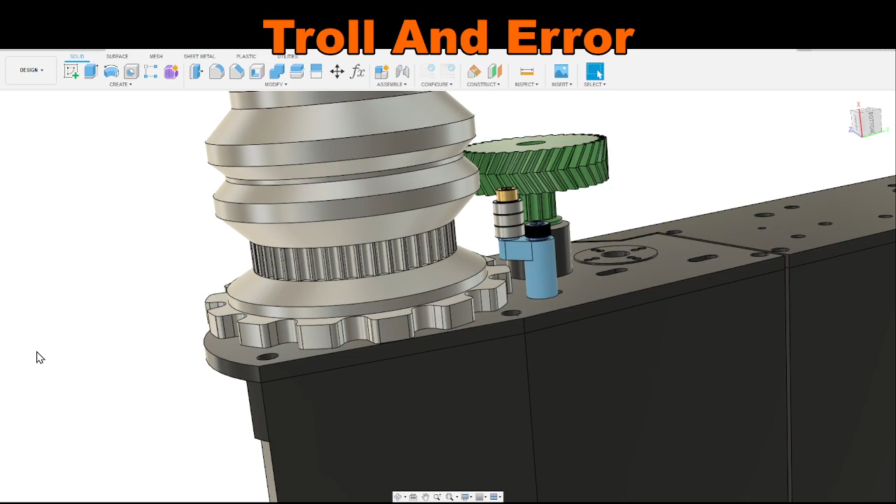I'm going to turn off these selection filters. Don't select anything. All right. Belt's going to go from out here somewhere up past this bearing and then around the other side and onto this pulley and then loop back around the other way. So it isn't going to hit this screw head at all. Now I need to add in the other components that I disabled, like the track drive infrastructure. Track infrastructure goes there. That is the main other part I would be concerned about. It just couldn't hit this roller carrier thing. I think we're fine.

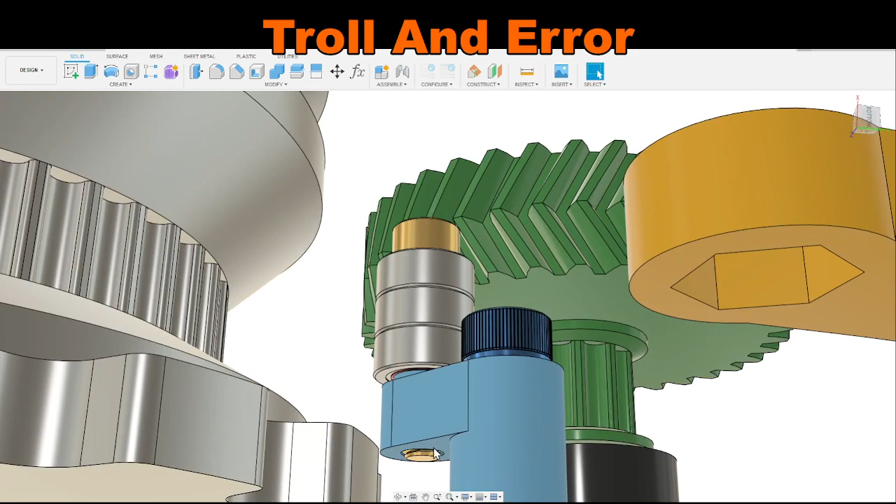I would consider pushing this in a little bit, maybe. It doesn't actually matter if this thing sits at the right angle, because with enough clearance I could rotate it slightly to change how much tension is on there. It would be better if I could make it sit a little higher, but that's okay. All right. I think that is a design I can test out. It doesn't require a lot of printing. I have the bearings already.

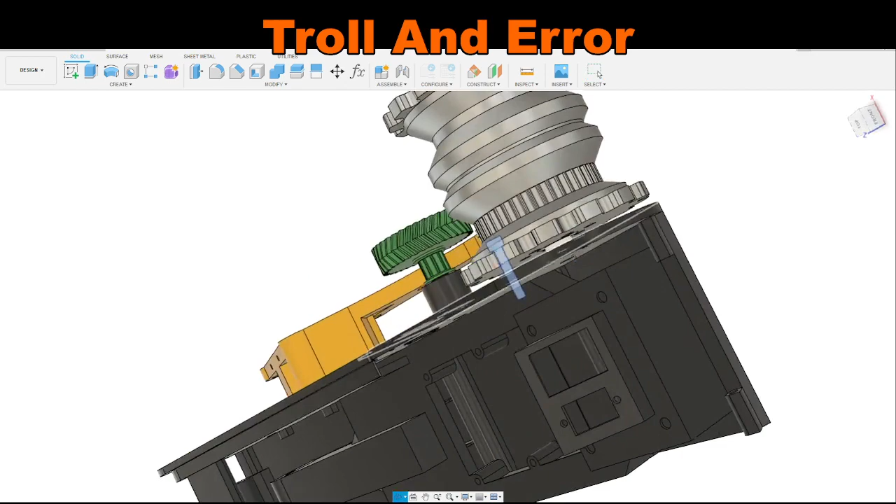I will need... Which screw is this? This one. How big are you? I'll have to go look and see what length I made it. Oh, I turned off the selection. Good job. Turn back on. Yeah, 20 millimeters. Okay, so I've got the screw for the M4. I don't have the screw for the M5, this one, because it is long. I don't have M5 bolts that are that long. That looks like I have enough thread inside this insert to hold it.

Oh, I think this would work. Maybe. My main concern is only, is this too much tension? Is this not enough tension? I don't actually know. But like I said, I could rotate it slightly to change that. Probably not a lot because of this distance.

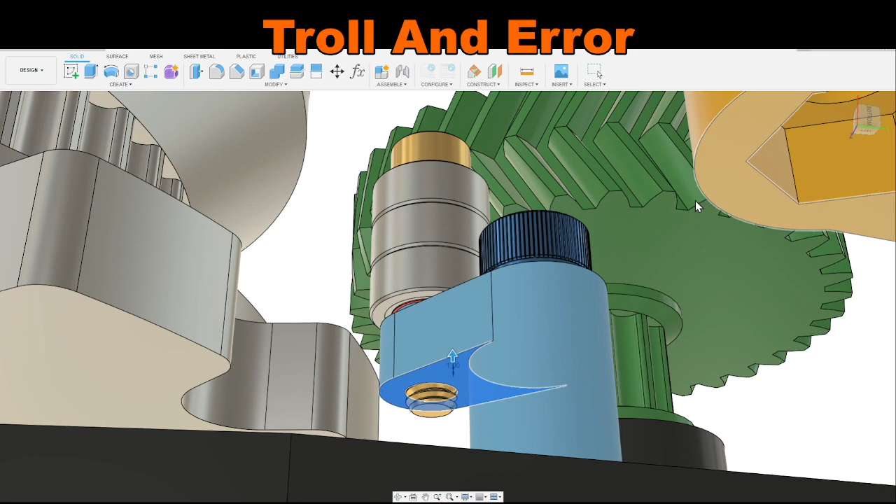I'm considering pushing this up. Let's push that up by 1 millimeter. 1. Why can't I offset that? 1 millimeter. Seriously, why can you not? Okay, let's put it this way, -1. All right, 1 millimeter shorter, 2 millimeters longer. Cool. All right. Not the most efficient way to design something, but okay, it's fine. It'll work.

I can't go too far this way because the screw and the sprocket will probably hit, but at least it'll keep the sprocket from wiggling enough to hit this arm. Okay. So I think that is the part that I'm going to try to go with. I already know the screw here is correct. I really need to get my M5 screws out and measure tolerance with my tolerance checker.

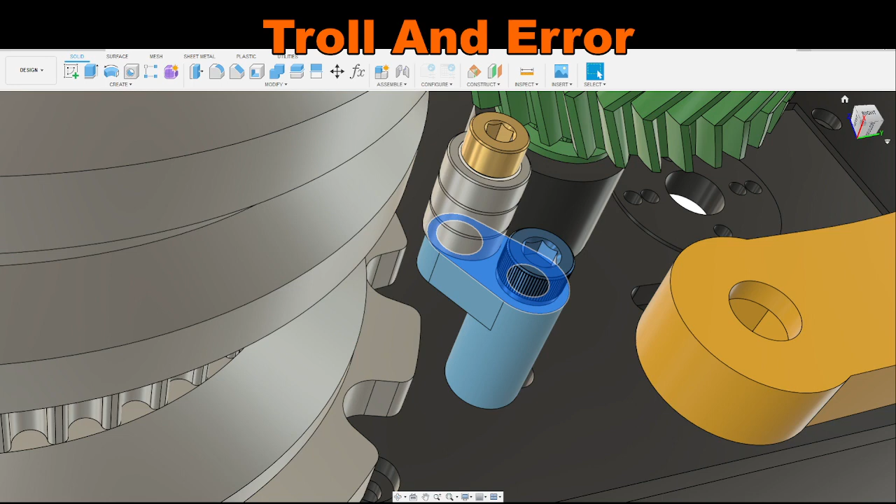Yeah. But that means before I print this, I just want to verify that this diameter is what I want. I already know the other one is kind of what I want because it's the same diameter that's in this post, and I know that works with the M4 screws. Right. I think that will do it for the time being. Let me look and see what's going on over here. Nothing major. Yep. Okay, I think that's cool for now. Let me save this. I mentioned saving it earlier and I didn't actually do so.

Alright, and we'll look at the actual path here. I need to make another sketch. Why not? I have a whole bunch of extraneous sketches getting in the way. I really need to clean this project up a lot, but for now it will do.

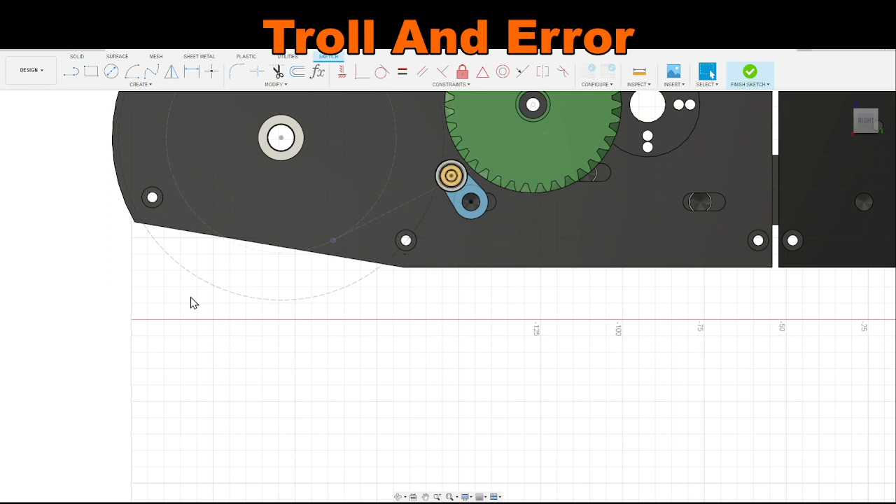Right. This sketch, yeah, is where? Where is it? Oh, okay. Oh, we'll use this one. I guess we'll project from this. Project from this. That's good enough. Alright, hide that. Turn this one back on, which I just turned off. Right now, we're going to project onto here also these rollers. Okay. X. Oh. X. Thank you. That's not the right angle. Alright. Turn this stuff off for a moment.

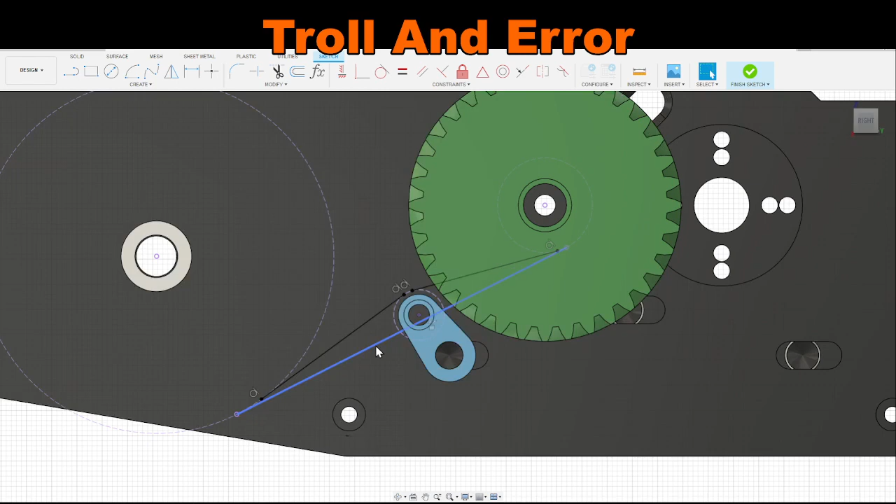And we put a line there to here. Line from here to here. I make this one tangent as well. This one tangent as well. All right. I'm going to project this one. Okay, so that's roughly how much deflection this has. Could I go further? Maybe. I don't actually know how much it needs. Possibly more than that. Track drive. All right. That's 10 millimeters distance between this point and the center of that one.

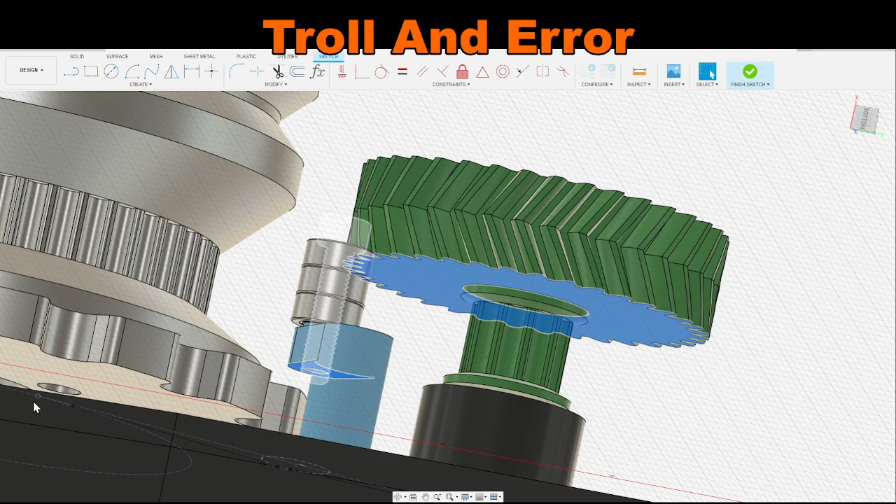But I suspect if I push it any further, this bolt here is going to hit either the gear or the sprocket. That bolt. It's either going to hit this part. Well, no, actually, it won't. But it might hit this part. Drag it up here so we can see. I don't know. I'll see if this is sufficient to fix the slipping on the pulley. If not, I will experiment with making this arm longer to tighten the belt further. That sounds like a good plan. All right. I think that will do it for now.